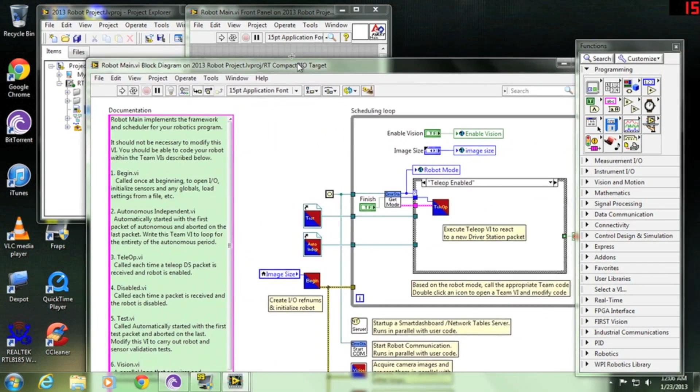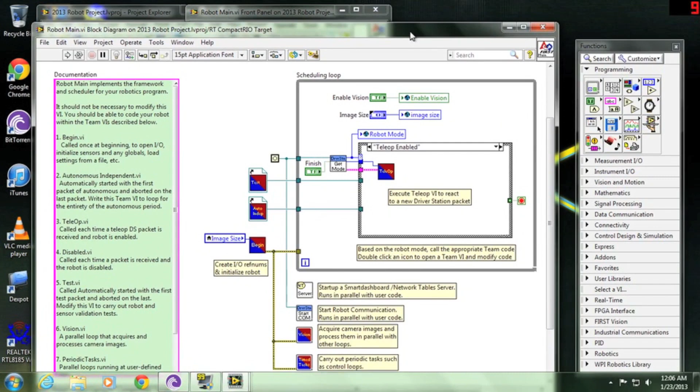A cool shortcut is Control E, which opens up the front panel. This is like the visual version - how it'll look on the dashboard when you open it up to use it. This is kind of like your user interface, all the fun stuff we get to mess around with. This is going to be your block diagram.

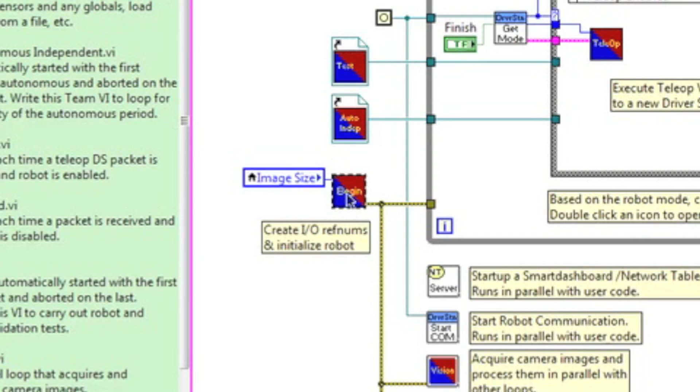This is the best place to put all your references in your Begin VI - that's what they're called, VI as in virtual instruments. For teleop, you'll want to put all your stuff in here. And for all you cool kids doing autonomous, you'll want to program that stuff in this folder. I'm going to show how my robot is set up, since we're running 6 wheels but only 4 motors for those 6 wheels.

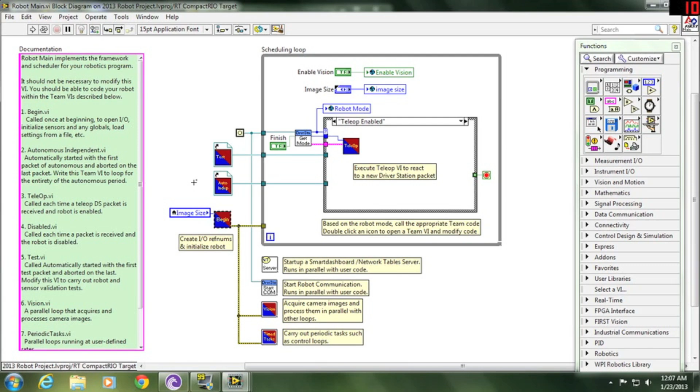So we're going to open Begin, Control E. First thing you want to do is open up your motors by going into WPI Robotics Library, Robot Drive, Open 4 Motors, since that's how many motors we have.

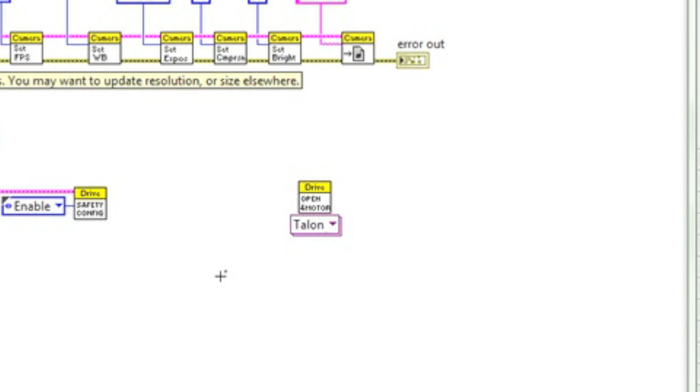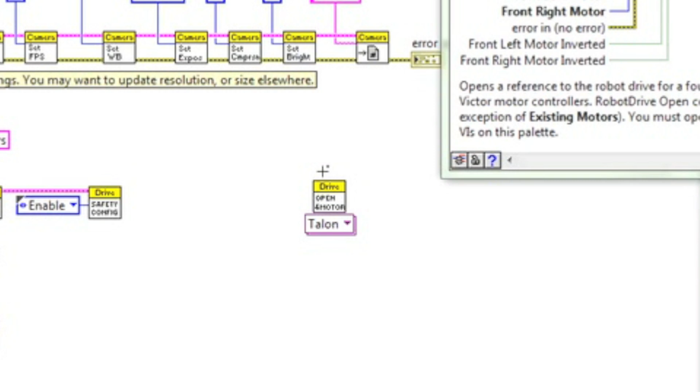This year we're going to be using Talons, which is kind of like an upgraded version of the Victor motor controller. There's a little arrow, a drop-down menu, and you click Talons for my team since we're using Talons. A cool shortcut is also Control H for help, and as you can see on this diagram, the blue dots represent which motor goes where. For my team, it's set up as the rear left motor.

You want to right click, create constant. For my team, the PWM is 3, and then you're just going to keep doing this for all the other motors.

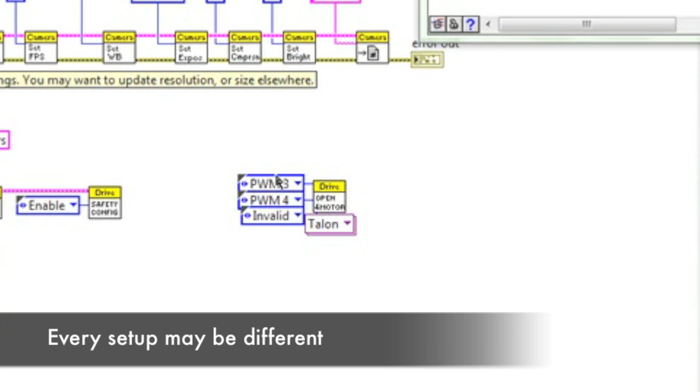Let's space these out, that's all I want - I want to space you out, you're in the way. That's always a good little tool: you right click on the wire and you can say clean up wire.

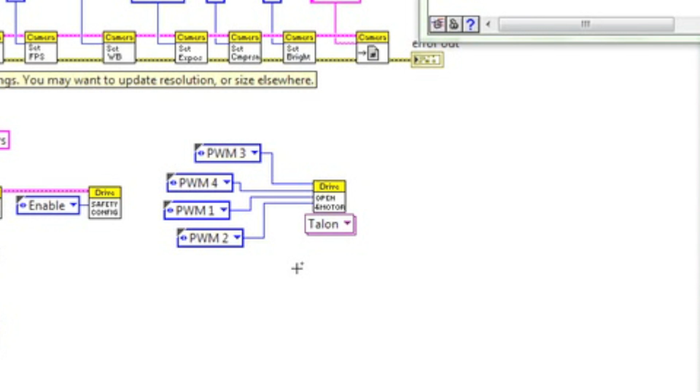When you connect motors, most of the time they run clockwise, because it's very rare that I've seen a motor run counterclockwise. So the issue is that when you put motors on one way, it's going to run forward or clockwise like normal, but on the other side it's not going to run forward clockwise. What's nice about these open drives is that it's already set up for you.

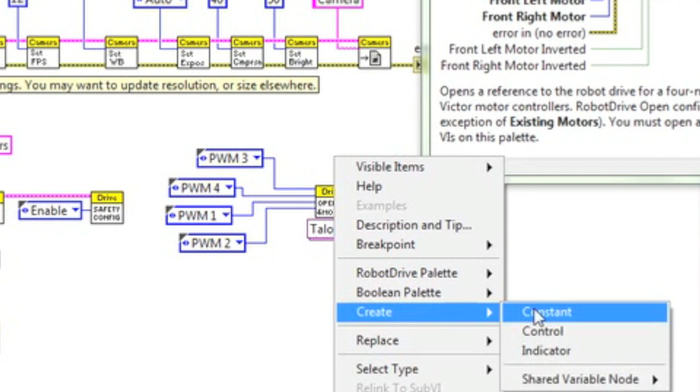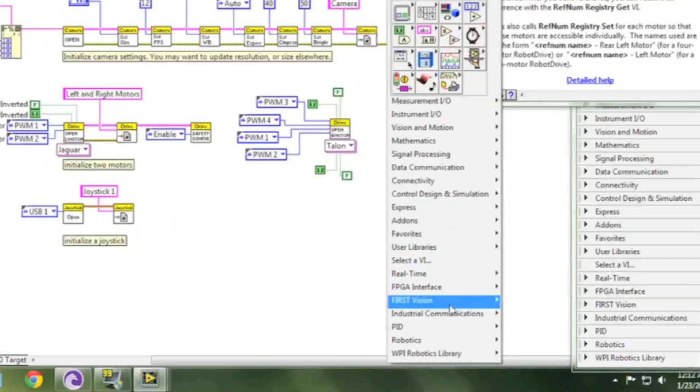Now that we have the actual motor in the drive, we need it set to something so that we can reference it in all of our other programs. So we're going to right click, go back to WPI Robotics Library, Robot Drive, and Registry Set.

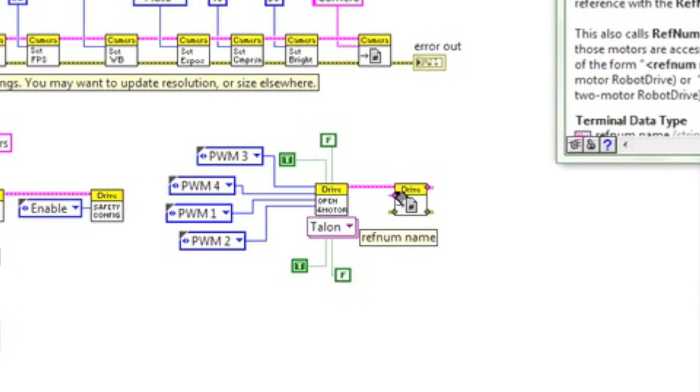Click, left click, left click, it's just connecting dots, that's all it is. As you can see on the help diagram, the flashing dot is your ref num, or ref name, or whatever you want to call it. Right click, create constant, and I'm going to move that up here because I don't like it down there. I'm going to leave it as robot drive because that's simple enough for me.

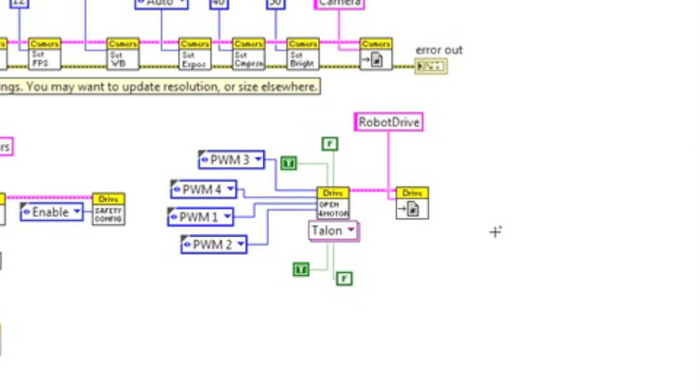So this year they made a new safety thing. Actually, they've always had it, but it's come to my attention that we even have one. You're going to right click, go back to Robotics Library, Robot Drive, where is it... safety configs, yay, because we as FRC team members love safety. Safety always comes first, not really, but okay.

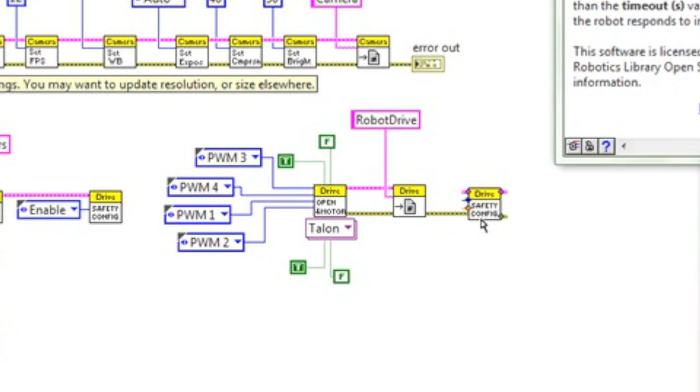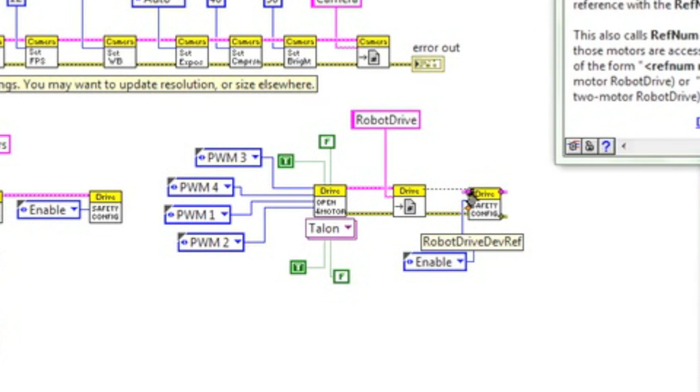Error out wants to be the error in, and error out wants to be the error in. We want to set that safety mode to enable by creating a constant. Right click, create constant. Pull it down, it's already enabled, so we're going to leave it the way it is. Then we're going to connect the little reference names because everything's got to be referenced. You don't want to leave anything empty. The timeout we really don't need right now, so we're just going to leave it.

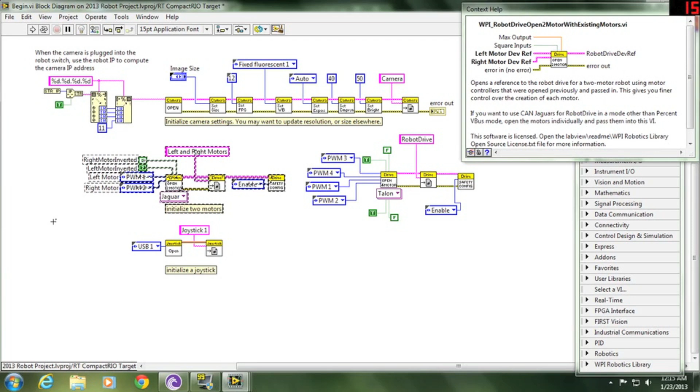This would be the normal setup if you were only running two motors. But I don't need that, so I'm going to go ahead and delete mine. It's just taking up space and memory, you know. Don't want to overload the cRIO.

Alright, this next part depends on how you want to control the robot. Our first year we controlled the robot using one joystick, and that mode is called arcade mode. It's basically just like when you're playing a video game: forwards is forward, backwards is backwards, left is left, and right is right. This year we're going to step it up. This year we're using what's called a tank drive. This is already set up, so we're just going to go ahead and use this because I'm too lazy to go pull out all this other information.

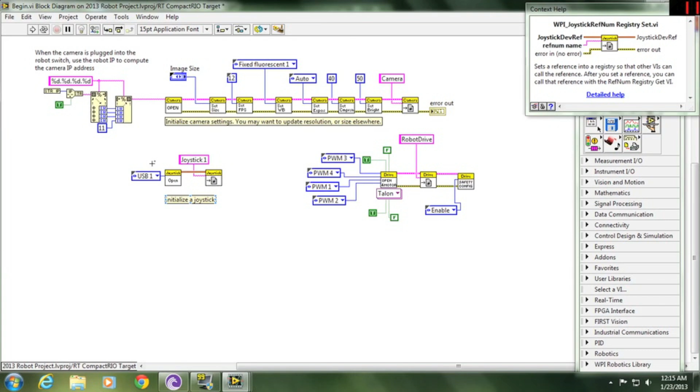If you want to and be cool, you just go Robotics Library, should be under the drive station, yes, and then joysticks, and all the things that are open right there. This is opened up so that we're in reference already, so we can use it. I'm going to go ahead and change mine to left stick so I know which one is which for when I do tank drive, and I'm just going to copy and paste it because that's how lazy I am. And the point of computers is to make us not have to do as much work. Then Control C, Control V.

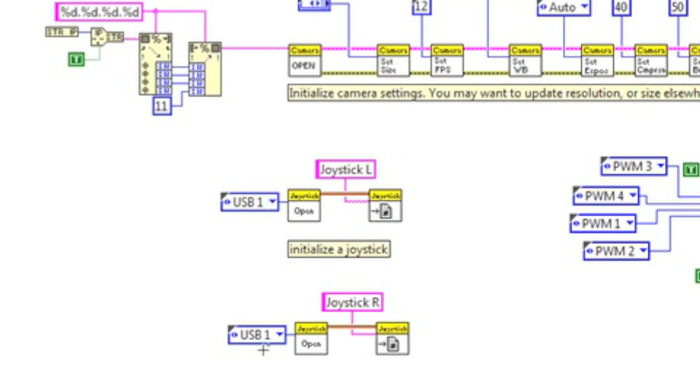Ta-da! Except we need to change the reference name to right side. Oh, my finger can't reach, that hurts. And you don't want them obviously connected to the same USB because that'd just be stupid.

I'm going to close this because it's in my way. It's bugging me. Close that. It's in my way. Close that. Close that. Close that. Now let's do some teleop. Let's do some teleoperational stuff.

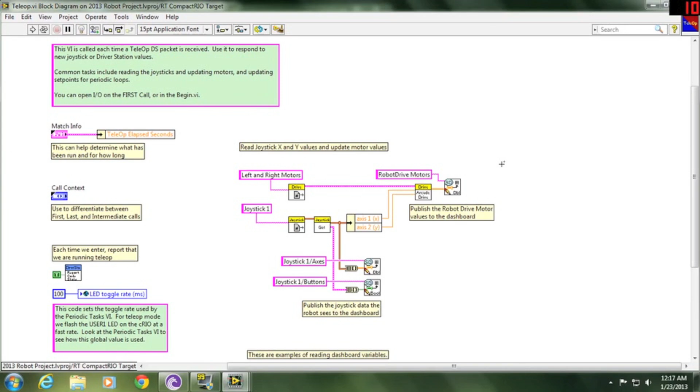So this year, they actually made it super duper easy for arcade users because it's already pre-set up. Sadly, we don't want to use arcade. So I'm going to right click my arcade and I'm going to say replace.

Tank drive, there we go. If you look down on your joystick, like it's an X, Y, you move your joystick left and right for X, and Y would be move your joystick forwards and backwards. So for tank drive, we really only need one axis.

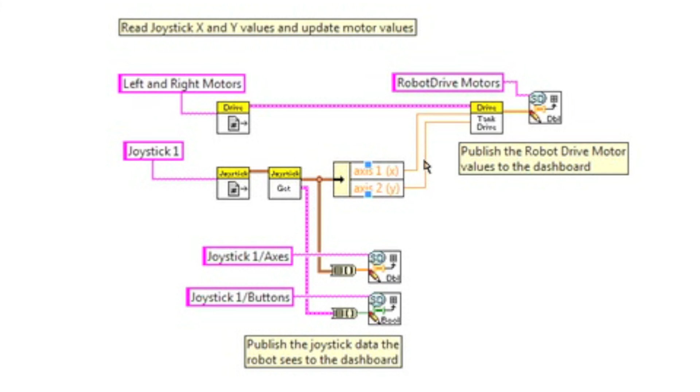So we're going to delete this wire, right click, delete wire branch. We're going to close this little cluster up a bit, and we're going to click here and change it, left click here, and change the axis to Y.

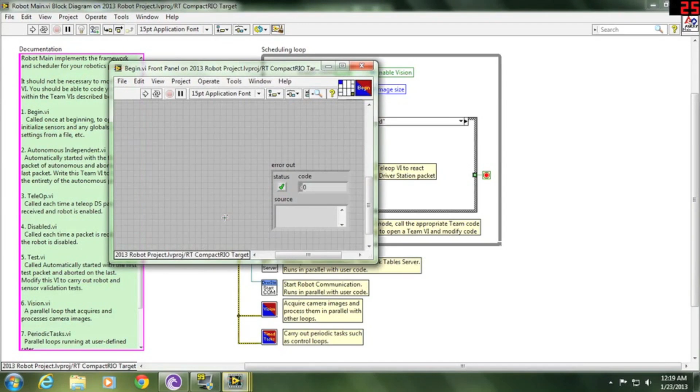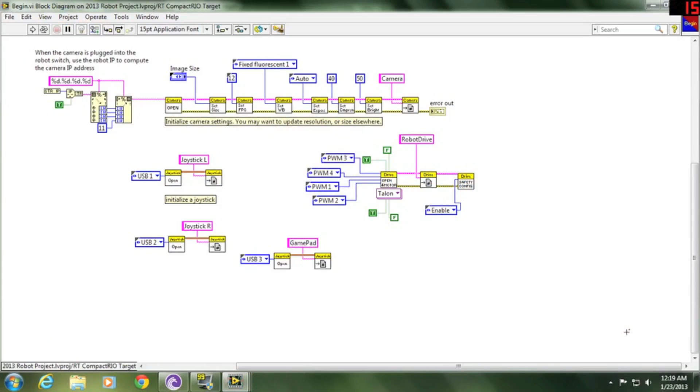And we need to rename this because this needs to be our left side. We need to rename this to whatever we named it in the begin VI. Can't remember, and you know, it's completely okay if you don't remember, I have a pretty bad memory and I forget things. Robot drive, yes. Make sure when you're re-referencing something, you have to reference it perfectly, otherwise it'll just screw up and not even recognize it.

This is kind of cool. Basically, National Instruments made it easier for you to post up what your motors are doing on the dashboard. And that'll be really nice once we set up the sensors and motor controllers and all that fun stuff.

For right now, we're not going to mess with it. I guess if you want, you can connect to the errors, but there's really no need to. This is more things so you can know how far your axis is moving and sends it to your dashboard. This one tells you what buttons you're pushing, and that also sends it to your dashboard.

For right now, we're just going to leave both those things, and we're going to copy this half. Oops, I copied too much. We're going to move this down first, and then we're going to copy this, so that way it's a little bit easier.

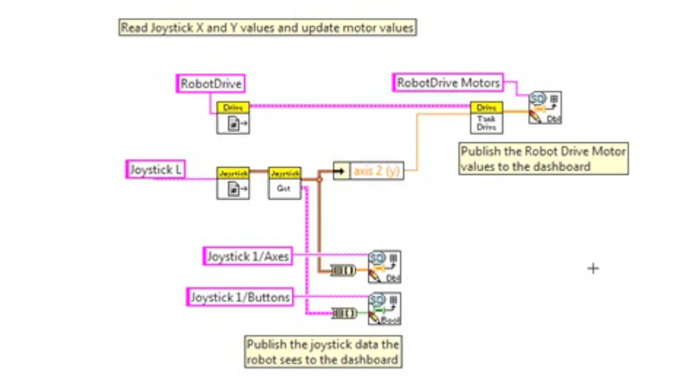Control C, left click somewhere else, Control V. And Control H, if we look at the help box, we can tell by the tank drive that has a left axis value and a right axis value. This other joystick is going to be our right joystick, which is going to be our right axis value.

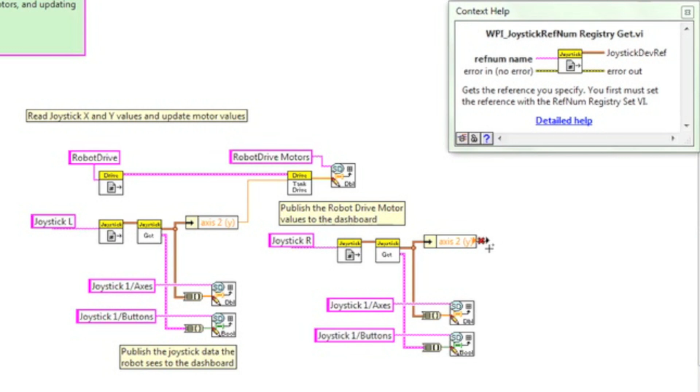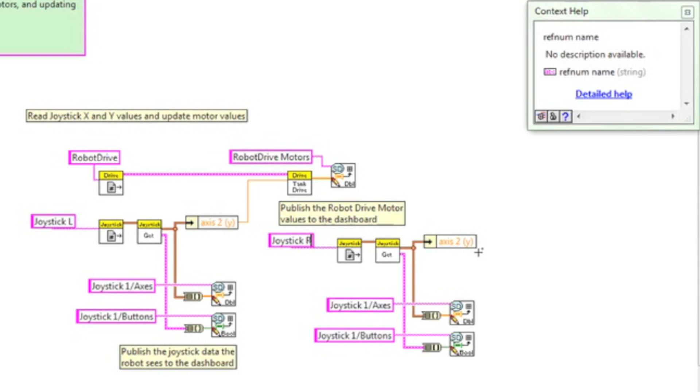Another cool shortcut, Control B, gets rid of all your broken wires with the little X's on them. So this is the second joystick. It's already pre-set up because I just copied it over. And we're just going to connect this wire to the tank drive, and bada boom, bada bing, we have a tank drive. Sadly, I do not have any joysticks with me, so I can't show you how well this works,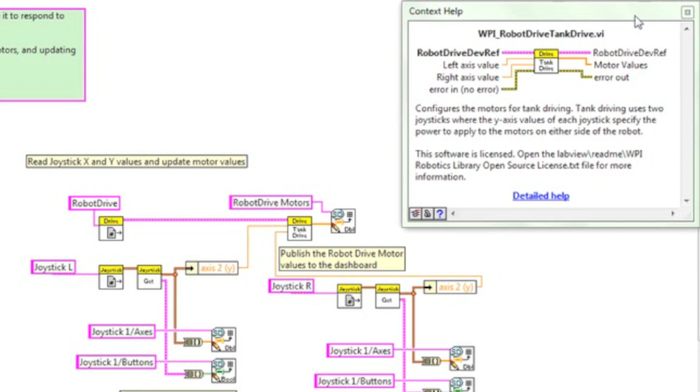But it works really well and it works fine. And if you run in the simulator, it's going to work fine. But since I don't have any actual joystick, I'll just make a little something in autonomous and have it running forward so that way I can show you how the simulator works.

Make sure you save everything, guys. When it says save, you want to click save, obviously. Save. All the saving money, saving deals, you know, Geico and all those other cool insurance companies. Oh my god, there's a lot of saving.

Anyways, once you get back to this little screen thing, it's really laggy. You want to go File and Save All, or Control Shift S, and you just want to make sure you save everything. Or click Save All this project, it's both the same thing. And we're going to close that.

Now, to demonstrate how the simulator works, I'm going to go ahead and open up another project. Obviously, you don't have to do this. This is just for showing you guys how this works.

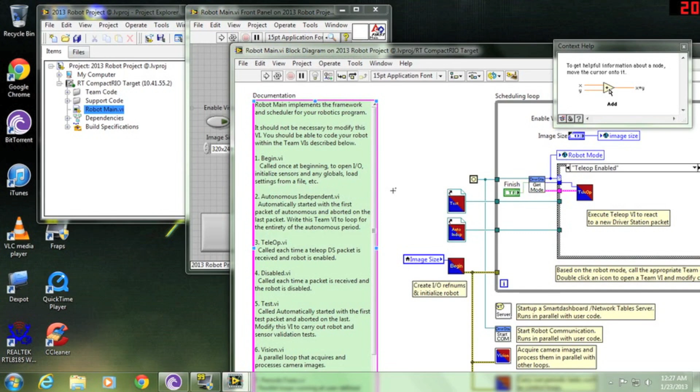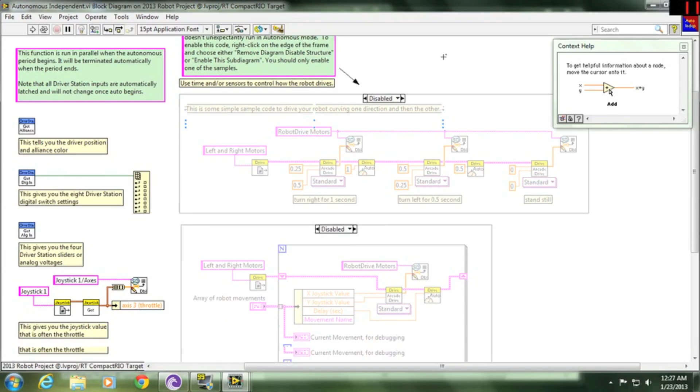Alright, so we got the robot main back up. This is the other project, obviously. Since this one's already set up for running tank drive, we're just going to go ahead and go with that. And you know, don't follow this thing for thing, because this is really just to demonstrate how the simulator works, and go over a little bit of how the driver station will show up.

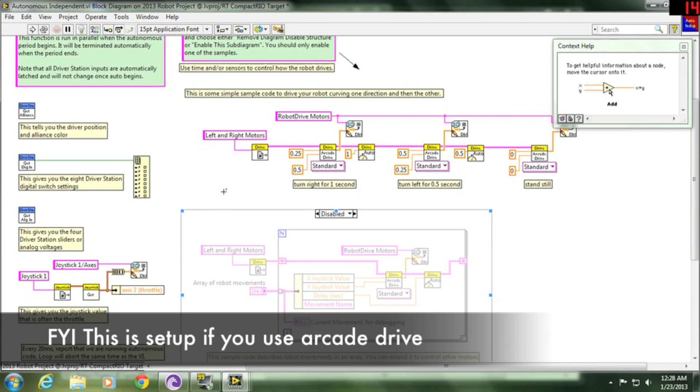So how the simulator works is first that we have to save everything. So just save it all, and then just close it all just to make sure you saved everywhere.

I need my driver station, because otherwise I can't control my robot without the driver station.